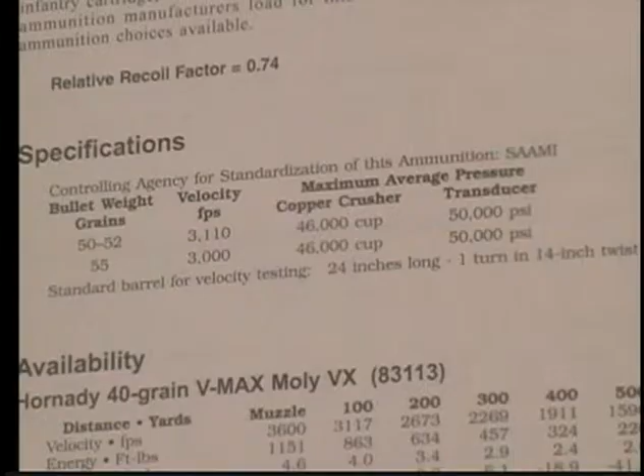One of my favorite books is this Ammo and Ballistics by Bob Forker, and this happens to be the second edition. I understand the third edition is out now. The advantage to this book is that it contains a great deal of reloading data, but it also has a complete cartridge drawing, and we have also a couple of different kinds of pressure data listed under specifications here. We have standard bullet weights, we have velocity in feet per second, and then we have copper crusher units and transducer units, which is PSI.

The difference between copper crusher and transducer is just literally worlds apart. They are not directly correlated systems, meaning that you can't take the two of them side by side and match them up. Copper crusher is the older system, and it was based upon the concept that you can take a piece of copper of known size and known quality and crush it, and that dimension can help you measure pressure. Now it measures only the peak pressure because when it is smashed, it's going to go to that peak pressure and stop. So you don't get a linear progression, you do not get a form wave that you can read that tells you what the pressure wave looked like.

So in that respect, it's fairly limited data. The other thing that we know about copper crushers is they're fairly limited in terms of quality and quantity. There are agencies that make this material for testing purposes, and they're very reliable. They've been doing it for a long time. But because we only get the peak pressure data, we're not getting a lot of useful information.

Transducers are a little different. They're a simple device glued to the outside of the barrel, and the dimensions of the steel are entered into the software, and this allows the software to translate the stretch of the steel through the transducer into a waveform so that you can actually see in real time the form of pressure, so that it starts low, runs high, drops back down, and with everything entered, you can even see the exit point of the bullet.

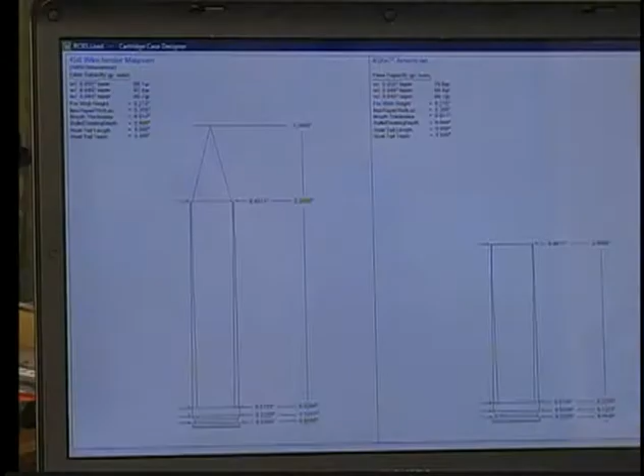On the left we have a 458 Winchester, and on the right we have a 458 2-inch American. Now the advantage to having a comparison side by side like this is you can take a look up in the corner here. We have some specific data for the cartridge in question. Initially it tells you what the cartridge is, or if you had a Wildcat name it would be listed here, and then it would list a parent cartridge. Case capacity in grains of water is very important. This isn't case capacity in powder, it's in water.

The way that is measured for this system and virtually every other that I'm aware of is to the top of the case mouth. When you do water capacity in a case, if you do it below the mouth of the case, you're going to get an inconsistent number. Some cartridges don't have a neck at all, so there would be no way to be uniform. So to be uniform, be sure you do your water weight capacity right to the top of the case mouth.

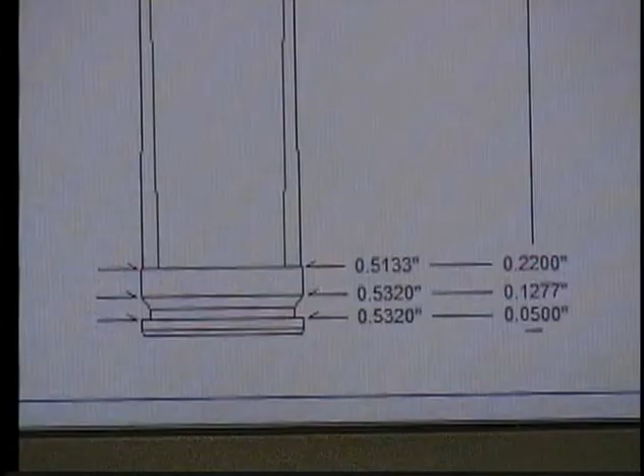The diagram includes dimensions for the diameter of the case, and on the right you're going to have length dimensions. As you move up the case, you'll get a length dimension for the full length as well as a mouth dimension here. This is your diameter of your mouth. And then it'll also give you an overall length. This is assuming the overall length for a magazine. This is a maximum length. So you can see why the software is so valuable to us when we do our research.

The research is the most important step, I believe, in the process. I said before, research, research, research. I really believe that. If you spend time reading about cartridges, if you do the research in books, use the software, it's very valuable. It's going to make it easier for you to make these decisions as you go down the road and not waste a lot of time on things that just won't work.

So I wholeheartedly recommend to you that you get a bunch of books, read them, research, look at the differences between cartridges and try and get a feel for what would be an interesting transition from a big cartridge to a small cartridge, or more velocity. How am I going to get that? Oh, okay, I need more case capacity. The more you look at these things and spend time looking at case designs, the more interesting it'll become to you, the more exciting it'll become, and it's just plain fun.

Now, I think we should probably move on at this point and talk about our project that we were going to get into with our little 358 Indy. And I think in order to do that, we should probably just go to the software. That'd be a good place to start.

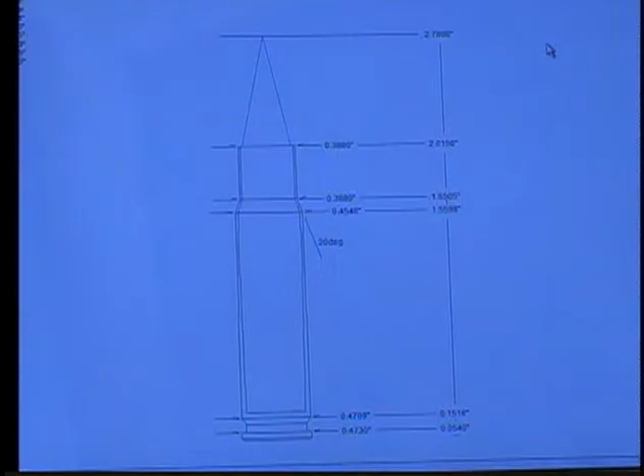So we're going to go to the menu here and tell it to draw this cartridge. We're on the 358 Winchester right now, and it draws the cartridge for us with all the dimensions so that we can kind of make a determination as to whether this is something we want to use. Now the first thing you're going to want to think about is the diameter of the case. Is it big enough? We know it is because it's already a 358 caliber. So the next thing we're interested in is whether or not we have enough shoulder diameter and length, and we clearly do because it is a 35.

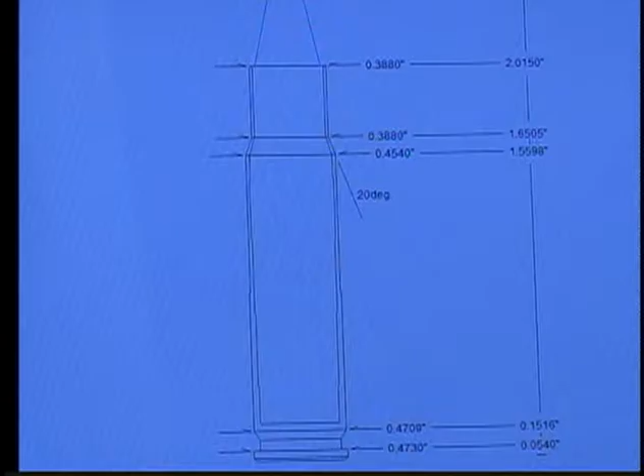The big consideration here is going to be, do we have enough case capacity for what we're trying to accomplish? In order to make this cartridge work, we would have to adjust the length considerably. Right now it is 2.015 in length, and we would have to shorten it almost 400 thousandths. The midpoint of the shoulder is about where we'd end up for our overall length. Consequently, we would lose a lot of case capacity. Now, that doesn't mean it wouldn't work. I think this cartridge would meet our needs. We can shorten it enough. We'd still have a shoulder. We'd have everything we need to make a functional cartridge. So this is one possibility. But I think we should look at some others.

Now, we can leave this cartridge up for reference. We can go back to the reference menu and choose another cartridge. A lot of people, when they start working with Wildcats, like to work with single shots because it gives them an opportunity to build an inexpensive gun and test a new idea. So one of the things we might try here is to look at a rimmed cartridge to see if that would work for our project. So we're going to just move across and find the 35 calibers again, just a simple way to do it. I happen to know that a 357 Herrett is close to our specifications for length, so we're going to go there. We'll click Draw. We now have both cartridges on the screen at the same time.

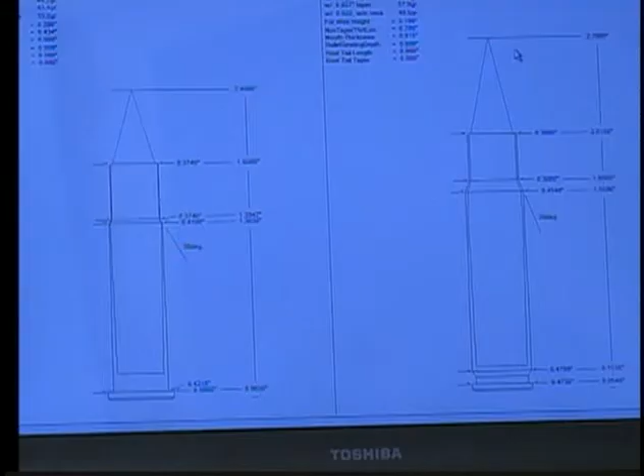So we have the 357 Herrett on your left. When we look at the overall length, it's clearly long enough for what we're trying to accomplish. The shoulder position is far enough down so that we could shorten the neck and have a cartridge that would fall within our length parameters. So this cartridge too would work. So either one of these cases would work just fine, but there's another consideration. We need to think about performance. Deer hunters are going to be looking for something that will allow them to have a little more power. These two cases may or may not be what we want.

Let's look up the 358 Winchester and see where it falls in our power range. And I want you to get the idea of going back to another book. You're not limited to the software, you're not limited to one book. Do research, move back and forth between the different pieces of material that you have at your hands. According to this book, the 358 Winchester is going to have about 2,370 feet per second for velocity, which is pretty minimal for a deer class cartridge. So if we shorten that case and minimize the amount of powder we have in it, we're going to have a case that is really not much of an advantage over the pistol cartridges that are available in that range.

And because the 357 Herrett is even smaller yet, we know that we would also be limiting ourselves to a fairly low power cartridge. So we're ready to go back to the directory and look for some larger cartridges, something with more volume. Before we do that, we should write down the case capacity of the 358 Winchester so that we have a reference point. We know we need something that will at least be this large.

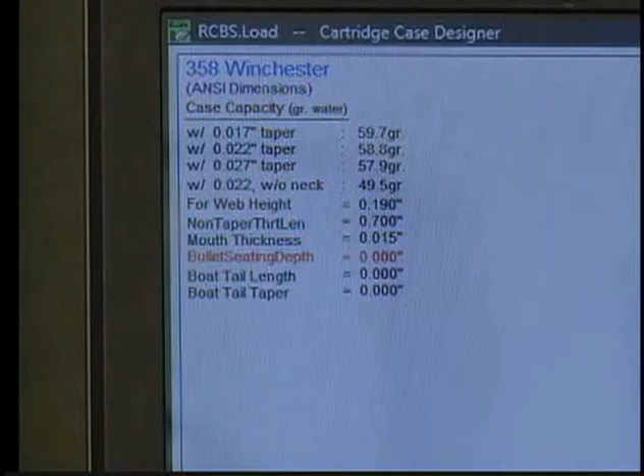So we're going to go back to the software. I'm going to make it a large screen so we're only looking at one cartridge. So we're going to move to the upper left-hand corner of the display. You'll note at the top that the name of the cartridge is listed. The next thing down is case capacity in grains of water. But that's not the capacity of the 358 Winchester. It's a theoretical number that you can use for design decisions.

And you'll notice that down below that there are a few more numbers giving different tapers. Again, these are theoretical numbers to help you make decisions. The number without the neck is, again, another thing to help you make decisions. In order to get the information we need on our cartridge, we go down to bullet seating depth, and we right-click on that, which selects that item. Now we're going to jump to the other side of the screen, and we use these little arrows to change the dimensions on this particular cartridge.

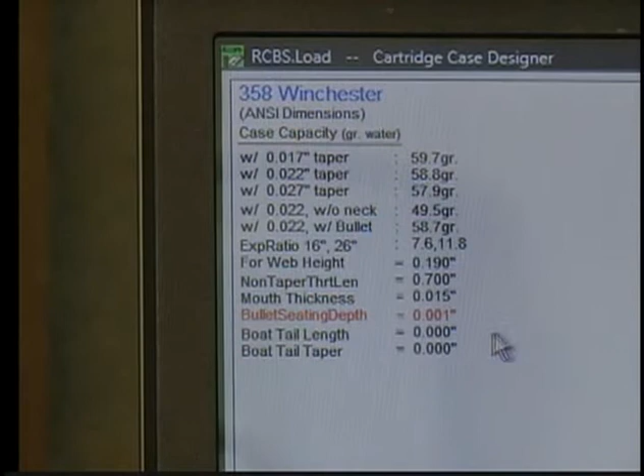So we're going to go up 1,000th, just one click. What that does is it confuses the software into believing that we have seated a bullet 1,000th into the neck, so it's going to give us the full case capacity of the cartridge. So now we'll go back to the other side of the screen. The first thing we'll notice is the bullet seating depth has been changed to 1,000th. And then a new line has been added. It says with bullet, and it gives us a case capacity of 58.7 grains. So that's the number we're going to write down as our full case capacity, and that's for the 358 Winchester.

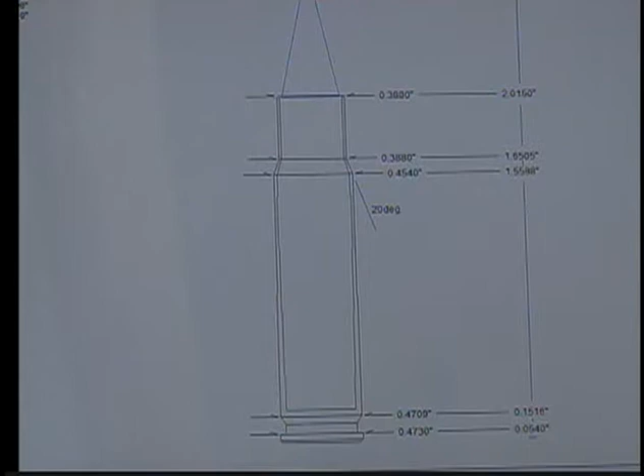It's important that you keep track of these little details so that as you progress along, you'll be able to match things up. So now let's look at the cartridge drawing again. We want to collect a couple of other pieces of information. We want the shoulder diameter, which is 454, and the base diameter, which on this drawing is 4709. We can just call it 470 and that'd be close enough. So we're going to write that down, base of 470 and shoulder of 454. We're going to use that information later to make sure that we're looking at a bigger cartridge.

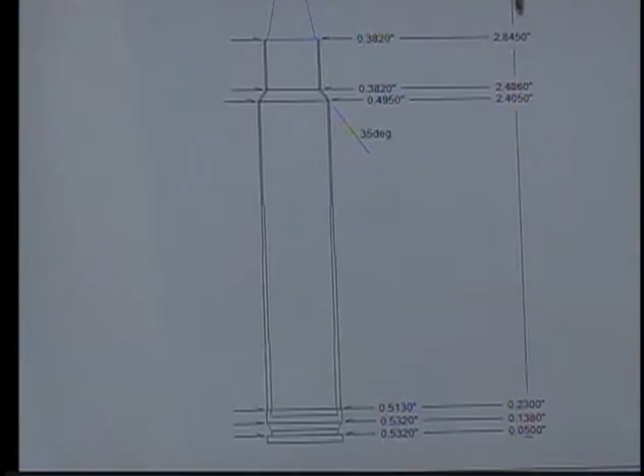So we'll close this particular pane and we'll go back to the reference library and pull up another drawing. And it's my idea that we'd go to a Magnum case to see if we can get something that's bigger. So we'll go to the 358 STA, that happens to be a large Magnum, draw it. Now the 358 STA is plenty long enough, so that's not a concern. Now let's look at the shoulder diameter. It's 495, so we're very large there, and at the base we're 0.513, so we're quite a bit bigger than we were with the other cartridge.

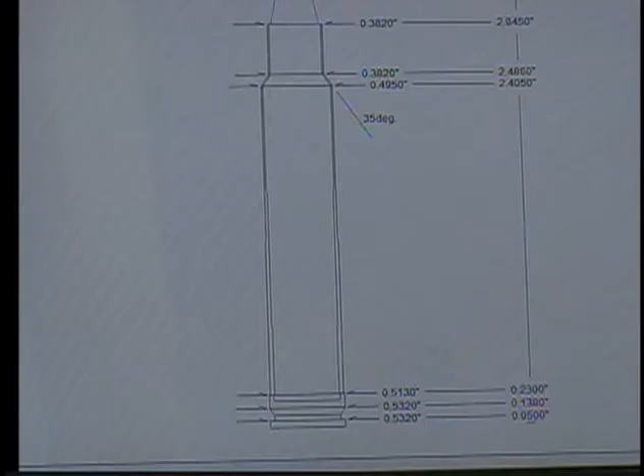Now, one of the disadvantages to going to a belted case is when we do a short design like we're talking about, that could present feeding problems because a belt is just one more thing that has to be fed through the system. So while it's a great way to headspace and a lot of people believe it adds strength to the case, there is the disadvantage with feeding, especially in a stubby case. So we may not want to choose this cartridge just simply because of the added difficulties we might get from this belt.

In addition, let's look at the shoulder. The shoulder height on this case is 2.486, which is very long, much longer than we need for our cartridge. The concern that you'd have there is when you go to reform this case, you'd have to push this shoulder down far enough on the case to leave you an appropriate length neck, and also to provide a cartridge that fits our parameters. So it'd be a lot of work. We'd be moving a lot of brass, and it would take extra tools. So not the most efficient use of our time, and that might not make this the best choice. But we can put it on our list because it would work. So we'll just write down the 358 STA as a possibility.

And then we can go back to the directory and look for something else. So we'll close this pane, go back to reference, and some other big magnum. I know that there's a non-belted magnum, like a 300 Remington Ultra Mag would be a good choice. So let's see if we can find it here. Remington Ultra Mag. And then we'll just tell it to draw.

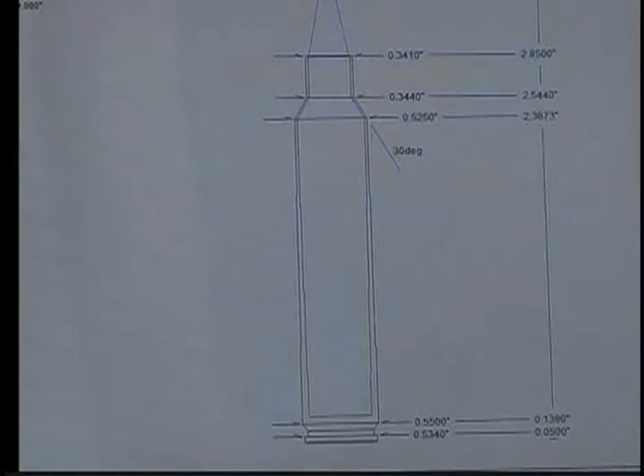Okay. Now, this case is 2.85 in overall length, so it's plenty long enough. Again, the shoulder is very high. It's 2.544. And base diameter is 550, so it's larger in diameter. That's a big advantage for us. We're going to get a lot more case capacity from a larger diameter case. We know that our 358 was 470 at the base from our notes, so this would give us quite a bit more case capacity.

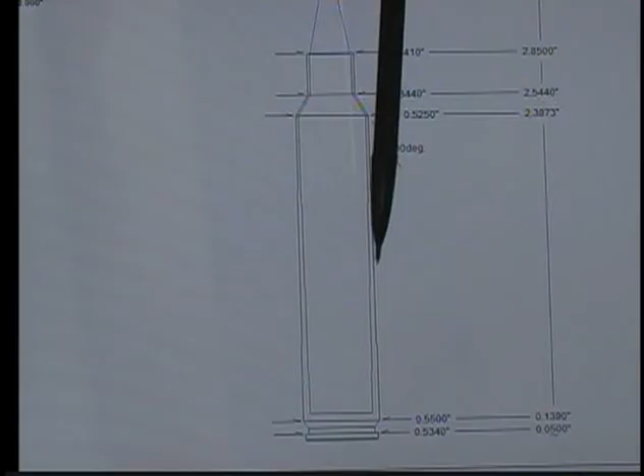Again, this one has the disadvantage of we would have to shorten it considerably, and a lot of these cases, when you shorten them a great deal, are thick in the case wall, especially right here in the midsection of the body. So it's a good idea to avoid that kind of change in the brass if you can, because you're going to have to do some different reaming and thin out the brass in order to make it functional. So while this one has more case capacity, I probably wouldn't pick it because there's so much brass work that I'd have to do. So we'll close this pane and go on and look for another cartridge that might work.

We'll go back to our reference chart. This time let's try something that we already know is pretty short. So I'm looking at my directory of cartridges here, and I see that the 25 Winchester Super Short Mag, or the WSSM, is not listed. And that might present a little bit of a problem, but I've told you before, and I can't say it often enough, you need to have other resources. So you could either go to a book, or in this case I'm going to go to another piece of software that I'm pretty sure will have what we need in it.

So we're just going to close this window, and we will move on to that other piece of software and find out if we can do that. So bring up this software now. This is a little different look. On the left-hand column we have our list of cartridges, and we're going to look for the 25 WSSM, and all you do is tap the bar here and bring it down to find the higher calibers. And we're in the 25s, and now we've gotten to where we're starting to see dashes and various caliber designations, so we're past where it would be. I don't see a 25 WSSM.

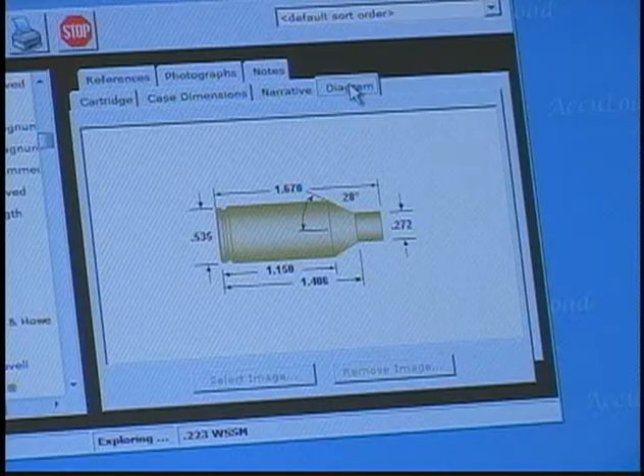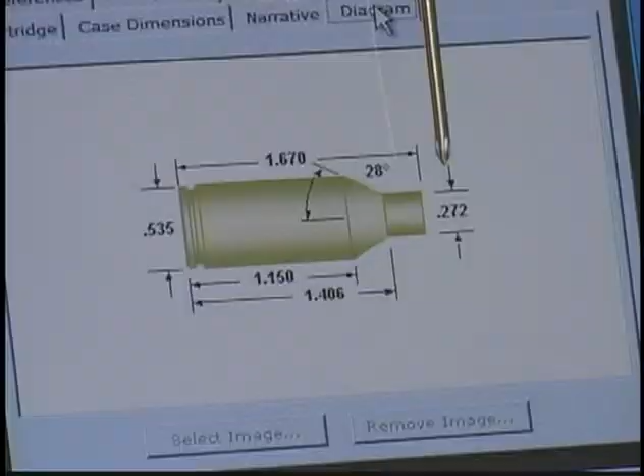Now what we have in the cartridge is, we'll look right here, our overall length, 1.670. Now that's very close to our dimensions that we're going to have to use overall. The diameter of the base is 535, so it's much larger diameter than the 358 was, so we're going to have a greater case capacity. Now the problem you might notice is the neck diameter is pretty small, and that's going to skew our number for our water weight capacity a little bit. Now when we redraw the case later in the program, you'll see that we can calculate what the actual water weight capacity is going to be, so that's not a big issue.

We're just going to use this drawing clearly to tell us that this is a potential cartridge for our project. In the real world, I selected the 223 WSSM for this particular project, and the reason I did was related largely to the fact that it was very close to the design parameters. And that's one of the things we want to emphasize.

The more cartridges you look at, the more references you check out, it's very likely you'll find a cartridge that's close to what you're trying to accomplish. And that'll save you time and money. It'll save you work in terms of making tooling, in terms of making reloading dies. It'll save you money in terms of ordering those things from someone.

So when you go to design a cartridge, just remember, go back and look again and again and again to see what else is available, because there's almost always a cartridge that's very close to what you want that will require minimal changes. Keep in mind, you need to have a case that has dimensions that are appropriate to the project you're working on, and also that has the case capacity or the volume that's going to work with the project you have in mind. Those are two very important criteria.

Now we're ready to move on with the next stage since we've finished our 358 Indy. But we have some opportunities here to talk about other types of wildcats you might be interested in working with, and this will give you some scenarios that are different from being limited to specific dimensions like we were with these state regulations. So we're going to look at a possibility here.

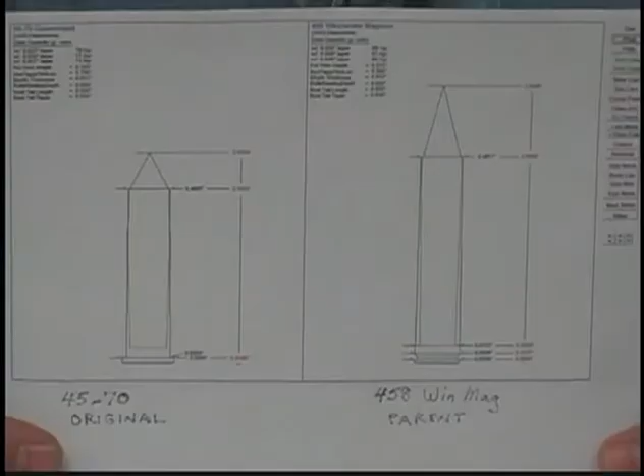On your left we have the 45-70, and that's an original black powder type cartridge that has enjoyed popularity for a very, very long time. So let's say that you really like this cartridge, but what you're looking for is something with a little more punch, something maybe a little more modern. So you decide that you'd be willing to put it in any gun, and so that changes your parameters in terms of designing a cartridge. You're able then to go to any action and any pressure level really, and so it just frees you up.

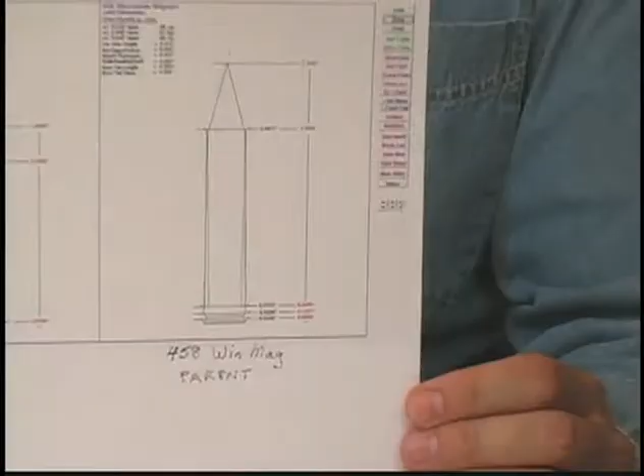So we looked at the 458 Winchester as a possibility as a parent for this new wildcat. Now the 458 Winchester is considerably longer, and the factory version runs higher pressures than we had in mind. You know, we're looking for something that's just a little better, has better loading flexibility than the 45-70, and takes advantage of stronger brass. So by going to the 458 Winchester, we've opened up those possibilities so that we can try and achieve a little more loading flexibility and be able to get some higher pressures and higher velocities. So let's look at the next step.

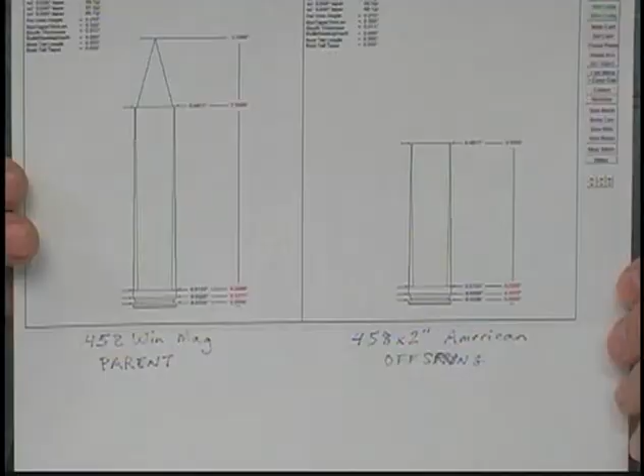Here we have the 458 Winchester on the left, which is our parent cartridge, and then we have a proposed cartridge on the right, which is the 458 2-inch American. 2 inches is just a nice round number. We know it'll work in shorter magazines and will be a functional cartridge. This cartridge has slightly less case capacity than the 45-70 we started with, but that's not going to be a problem because we've gained the ability to use different powders and load to higher pressures. So you'll get that gain in performance, that increase in velocity that you were looking for.

It just so happens that this cartridge was already designed by a gentleman by the name of Frank Barnes. We just showed it to you for the very reason that we wanted you to understand that there are many reasons to design a wildcat. This was just one. Now let's talk about another reason why you might build a wildcat.

Let's say that you have a favorite rifle that you've had for years, and for some reason the brass that you use for that cartridge has become hard to get. It's virtually unavailable. Now, you've looked around to see what other cartridges you could conceivably rechamber to, and it appears that there's nothing available on the commercial market, and so a wildcat starts to become a good idea.

You look around and there are no wildcats in this particular area, so the first thing you do is start to look and see what cartridges are available that might allow you to go to a larger diameter and clean up your entire original chamber. So in our made-up example, your favorite gun was chambered in 358 Norma Magnum. In real life, that brass really is hard to come by.

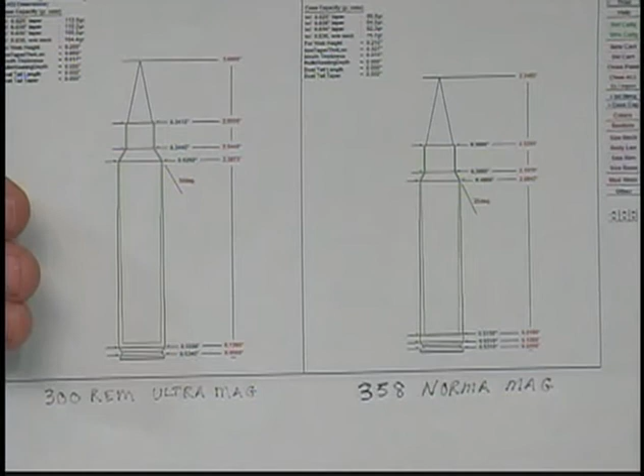So we started looking for a piece of brass that would allow us to completely clean up the original chamber. The 300 Remington Ultramag will accomplish that. You can see here that it's considerably larger in all dimensions. The disadvantage is it's longer than our original cartridge, so we'll have to move the shoulder down and shorten the case to make it work in our shorter magazine.

Now in reality, a client asked me to build this cartridge. This is the 300 Remington Ultramag cartridge, which we chose as a parent when we decided to replace our 358 Norma Magnum. So you can see by the replacement cartridge that we've reduced the length of the cartridge somewhat, and we've moved the shoulder back so that it'll function through our new chamber.

Now the customer was happy with the results of this project, and he named the cartridge the 358 Yukon. It resolved the problems that he had and allowed him to continue using a favorite gun. Now for us, it's simply an example of one more reason why we might design a wildcat.

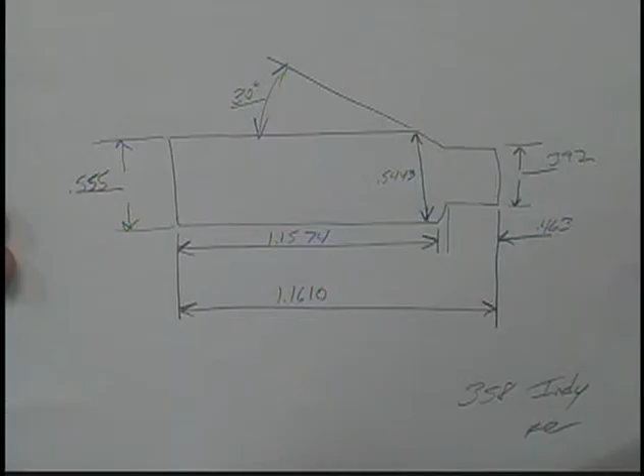When it comes to doing drawings to represent your cartridge, there's a number of ways you can do it. You can start with something as simple as a pencil drawing, and it'll totally suffice. All you're going to do is gather the pertinent data. You want your base dimension for the cartridge, the shoulder dimension, neck dimensions, length from the base to the shoulder, and the length from the base to the full length of the cartridge.

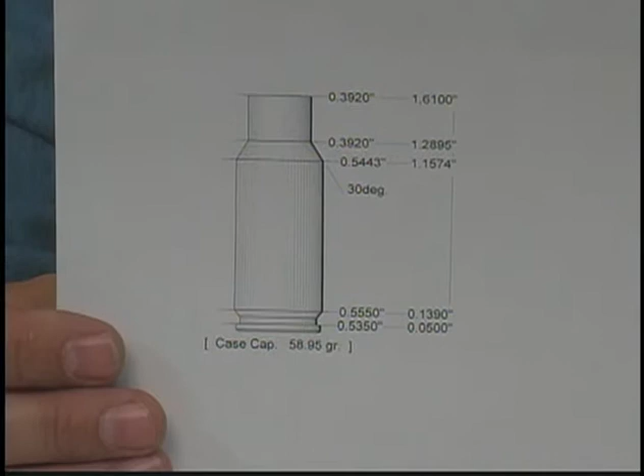The advantage to this, of course, is it automatically adds in a couple of other extra things. A little easier to read. It's going to give you your lengths for the neck and that sort of thing. So it has some advantages, but it's no better or worse necessarily than a hand-drawn drawing.

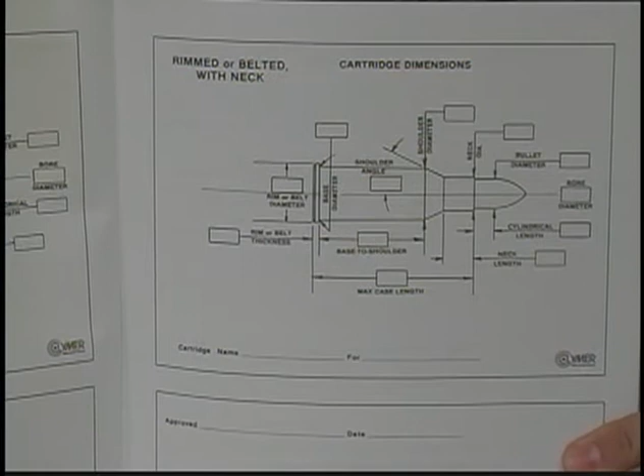Now, Clymer Manufacturing in their product catalog includes something that's very useful. It's just a simple set of drawing templates, and they're available for all the different styles of cartridges, whether it be rimless, rimmed, or belted. You can either do a cartridge drawing, or as we're showing at the bottom here, you can do a reamer drawing. I usually recommend, especially when you're just getting started, that you do the cartridge drawing. It's the easiest one for you to do. You can measure directly off your brass and get real-world numbers so you know exactly what you're working with.

So after using that, what you can do is you just photocopy those pages, and we took our same dimensions and just entered them in the appropriate boxes. And there is a little bit of room here for some extra information. It's not essential that you add this information, as the reamer maker knows how to do that.

The drawback to this particular drawing is that it doesn't directly represent your cartridge. It's just a visual representation of a bottleneck case. So you're going to enter your dimensions, but it does not give you the direct visual representation of what you're designing. So just keep that in mind.

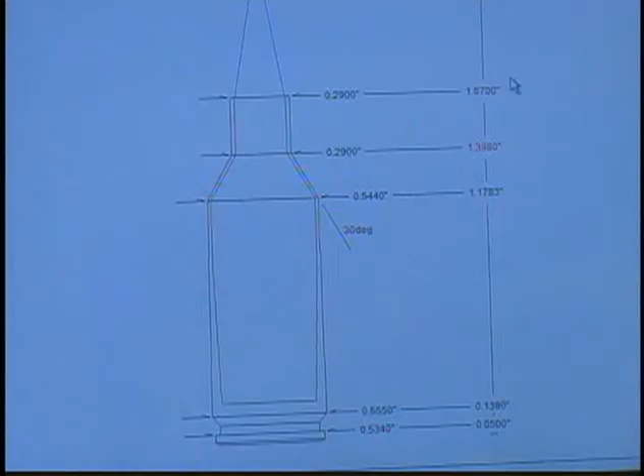Now we can go to the software and draw a cartridge, and what we have here is the 25 WSSM in the software, and we're able to modify the shape of this case on the fly. It's fairly simple. We'll go and select particular items. Right now we have the length dimension selected here. That's not going to do us much good at the moment, so we'll go over and select the neck diameter. We're going to resize the neck over here on the menu.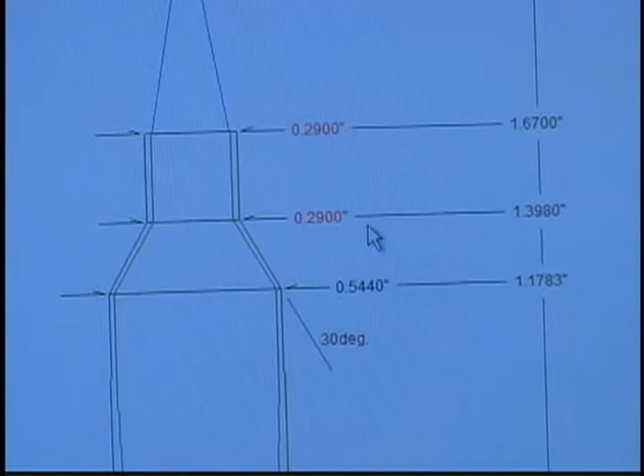So when we do that, it selects both the upper and lower measurement for the neck, so that we'll be changing those dimensions at the same time. We just simply go over to the up and down arrows. We're going to be increasing our diameter, and for a 358, .386 is a normal outside neck dimension for loaded ammunition, and that's what we're representing here. So we'll just click the up arrow until we get to .385, and we move over one thousandth and we'll get to 6.

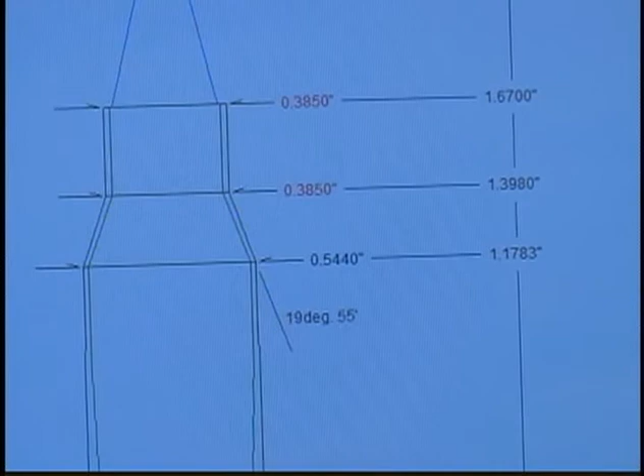Okay, now we've changed that, and what it does is it changes the shoulder angle at the same time, so we're going to have to make a correction for that. We've decided already that we're going to keep the same body of this case and simply rework the neck and shoulder area. So we'll now correct the shoulder length in order to get the shoulder angle back to 30 degrees where it started. So we just select that length.

That's the junction of the neck and shoulder. Drop over to the down arrow and move that down, and you can watch the angle change as we bring that junction down. And we're going for 30. I went a little too far, so we just go up. 31, that's 29. So by switching to the different arrows, you can modify how much you're changing it. We're down a little bit, so we need to go the other way. Okay, we're at 30 degrees.

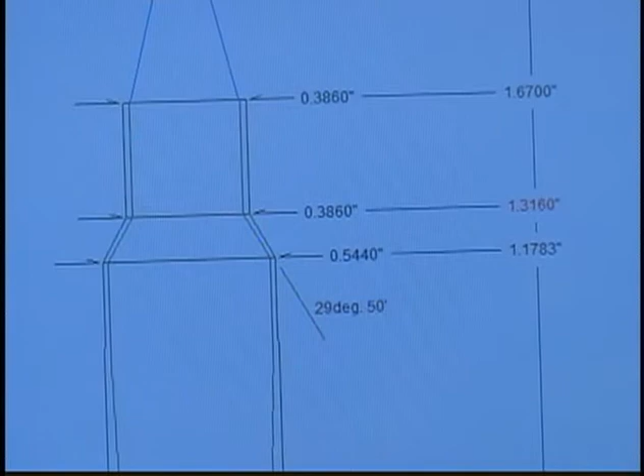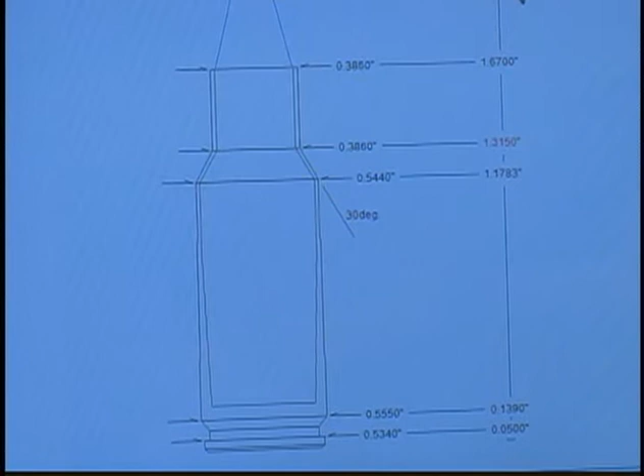So this gives us a representation of the cartridge pretty much as we want it. The only thing that's wrong right now is the length. So we have a base diameter and a shoulder diameter that will function with us. We have a neck drawn for 358 caliber so that it'll accept the bullet. And then we're going to have to come back and shorten the neck in order to meet our dimensions. Let's take it down to 1.61, which will be just a little bit shorter than the maximum dimension, and that allows for some brass stretch, and will keep guys out of trouble in that respect.

So we'll just again select the length, and shorten it up. And there we are at one. Oops, I'm in the wrong column. Move over one more. There we go. 1.61. So now we have a dimensionally correct drawing for our cartridge.

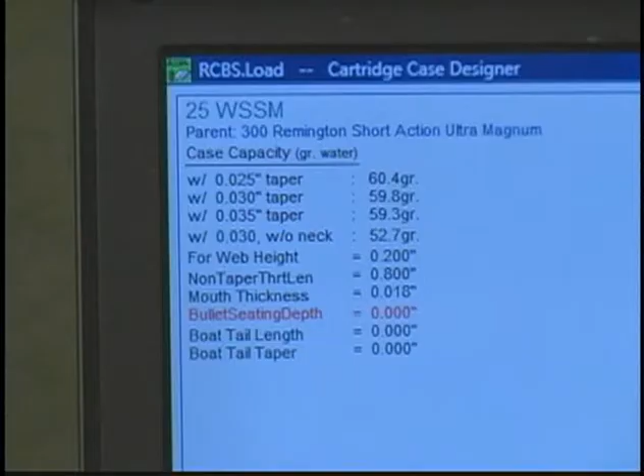And all we need to do is get the case capacity for this specific drawing so that we know how to compare it. So I'm going to move up here to the bullet seating depth, just like we did before. We select that, and then we have to run to the other side of the screen to change the seating depth. We just go up a thousandth to get that, and back to the left again, and we're going to look at with bullet. We have 59.8 grains of case capacity.

So we actually have more case capacity than we did with the 358 Winchester, which was 58.7 grains. So it's not a great deal of case capacity change. It's probably small enough that you wouldn't see any real difference ballistically, but it does meet our minimum requirement. So the drawing's complete, the dimensions are correct, and we're ready to print it out.

However, there's nothing wrong with the plain old hand-drawn drawing. The reamer maker can work from this and give you a perfectly good representation of your reamer. Just make sure your dimensions are correct, because he'll build what you tell him to. Now, when you send that off to him, he's going to send you back a finished drawing. Pretty cool, huh? This is going to be something that represents everything he needs to build your reamer. Now that the drawing's out of the way, it's time to go to the next step. We're going to compare our cartridge to other existing cartridges and make sure we're not repeating history.

We're ready to start talking about steps 4 and 5. Step 4 is the process of comparing our cartridge to existing cartridges. Grab your research materials and go back and look. We need to find out if this cartridge is going to duplicate something that's already in the market, either commercially or as a wildcat. Now, once we know this, we can make a decision whether or not we want to build it. And it's up to you to decide that. It doesn't matter if you've got a cartridge that's very similar to something else. If you decide that it's different enough and it's something you want to build, you're free to do that. After all, you're the king.

Now, the idea here is we're trying to make you fully informed. We don't want you to show up at the range someday with your brand new Irgersplitten Loudenboomer and have some guy lean over your shoulder and say, wow, that looks just like a 308 Winchester. And you suddenly find yourself in an embarrassing situation. Instead, you'd be able to turn to him and say, well, yeah, this is very similar, but I'm doing it my way.

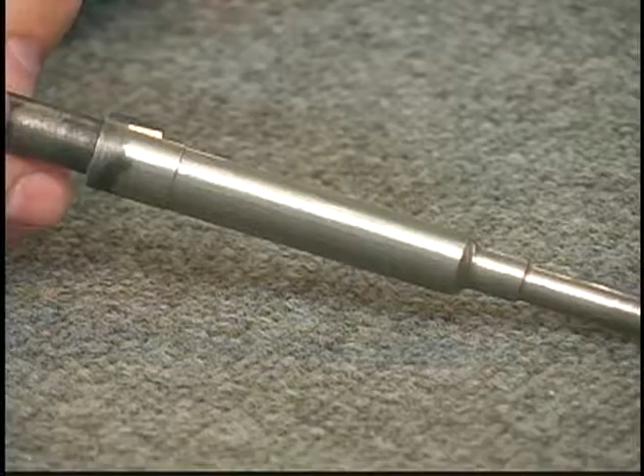You're probably asking, what is this unassuming little tool? Well, it's a single flute chamber reamer, and this is where we often call these a cannon reamer or a shell reamer. And you're probably looking at this. I know when I teach my classes and I pass these around, the guys always say, are you kidding me? We're actually going to try and cut a chamber with something like that? It doesn't look like it would do anything, but you'll be amazed just how fast this will peel up chips and cut. They work every bit as good as a multi-flute chamber reamer does.

Now, the things you should know about these, they can be used for a lot of different things. You can use them as a chamber reamer. You can make them specifically to do neck work, throat work. You can make them for resize reamers. Just about anything that would use a form cutting tool, you can make a cannon reamer to do that particular job. Now, the tools you need to make these are pretty straightforward. Any shop that has a lathe and a mill, you'll be able to make one of these. You don't even really have to have a mill, because you can use a grinder to do the half profile. And you will be using a grinder to remove the excess material from the reamer later in the program.

Let's talk about the pros and cons of a cannon reamer versus a multi-flute conventional reamer. The pros are that the cannon reamer itself is cheaper to make. It takes a very small amount of material. They're highly versatile. You can make them in any shape or length that you need. They're easy to produce. It doesn't take a huge amount of skill. If you can run a lathe, you can easily make one of these.

The cons are that these reamers have a relatively short life. They're not good for production work. One possibility is you might warp it during heat treat, and of course that means you're going to have to make another one. I recommend that you just plan on having to do that, because I've made several duplicates myself over the years when I've made one of these and it warped during heat treat. Large diameter reamers can be a problem because they tend to grab in the workpiece. So when you make one of those, you'll probably want to make it in a 2-flute, and we'll show you later how to do that.

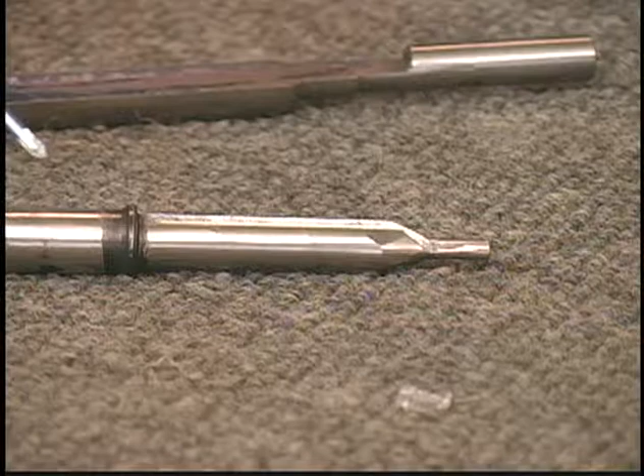This one, you can see here we have a nice long taper. You can see the beginning of the shoulder here, nice clean angle, and then we have no neck whatsoever on the pilot. Now, the reason for that, of course, as we discussed a moment ago, is that the die blank itself can take care of that. All we have to do is ream the die blank to the correct dimensions, and this pilot will just run in that hole and cut us a nice clean body. The neck is taken care of on its own.

Think of how tedious it would be to have to turn a neck on a small diameter like this and then have to do the relief grinds. It would take a great deal of time. It takes a lot of time on a larger reamer as well, so we're really talking about simplifying the process, allowing the die to take care of the neck. Now, I would recommend that when you go ahead and start this process, that you practice with one that actually has the neck built into it.

And you should do it 2 or 3 times, because you're not going to get it right the first time. There's nothing wrong with making mistakes, and frankly, drill rod's pretty cheap. So making mistakes isn't a problem. You're going to learn more from that than you do from your successes. And I'd recommend that you go ahead and do some practice pieces in advance, because you don't want to be on the clock when you do your first reamer.

Now, the reason we talked about doing the cutting edges on the neck, and that's a good thing to practice, is because someday you're probably going to want to make a chamber reamer this way. And I'll talk more later about the other features you need to include in that, but that'll be good practice and you'll be ready for that later. So let's go make a reamer.

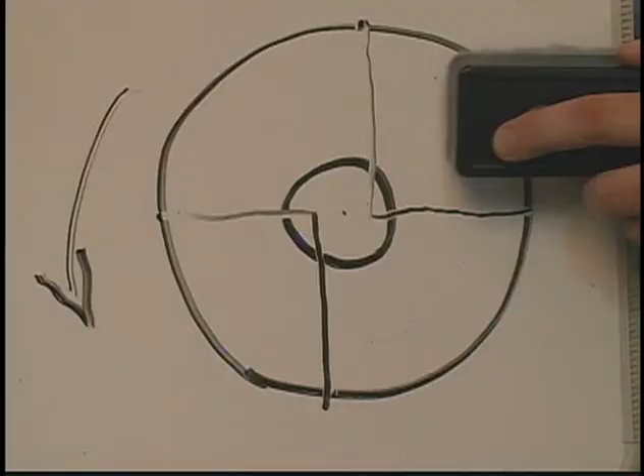If we get below center line on our cutting edge, we'll cut too large. If we go above center line, we'll cut too small or not at all. So keep those things in mind. Now once you've made these cuts, of course, the reamer is going to look a little different. It's going to be more like this. We'll cut this other part away. So you're going to end up with a profile that looks something like that when you're looking at it from the muzzle. And you note that the two don't cross in the middle, which would cause a weakness to the reamer.

So when we start the relief grind process, we need to think about a couple things. First of all, behind the cutting edge, you want to make a relief grind that's just a little deeper than probably the rest of it. And what I usually do is I come in and I use the radius of the wheel to cut about a 20 thousandths deep groove below the cutting edge. And the purpose of this groove is to give a place for oil and chips to go to so they won't get caught behind the reamer and cause scratches or galling. I leave about a 1/16 of an inch that's going to be the edge that we're going to sharpen later. I leave that right at the cutting edge.

So once we do that, we'll come back and we'll also grind away behind this all the way along here. The only place the reamer is going to touch when it's finished is on the pilot and on the cutting edge. So we're going to shrink the profile of this reamer except for the diameter of the cutting edge. That's the only dimension that is going to end up remaining full profile. Now we'll do the same thing on this one.

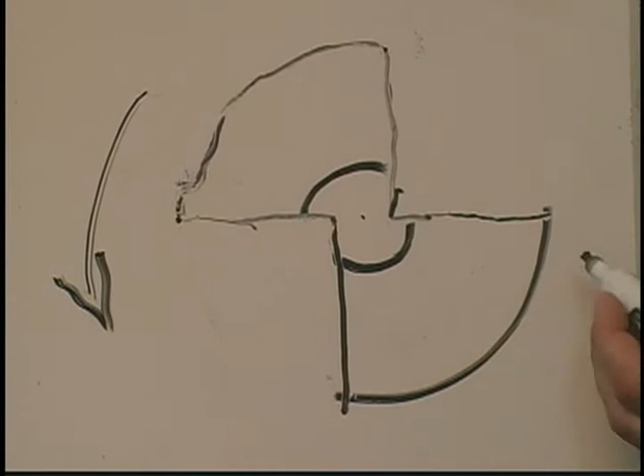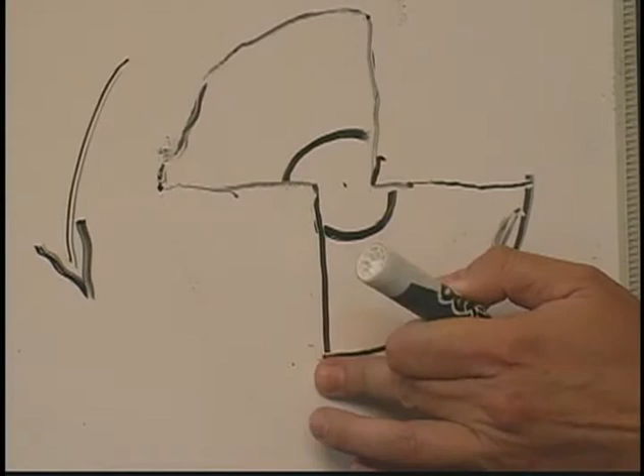We're going to do another 20 thousandths relief grind down here, and we'll also do a relief grind behind the cutting edge all the way around, again reducing the profile but leaving about a 1/16 of an inch up here at the cutting edge. This area of relief behind our groove is probably only 10 or 15 thousandths. It's not as much as we cut here, but it has to be enough so that it clearly does not touch and chips can't get caught in between. So just figure 10 or 15 thousandths and that'll work.

If perhaps you do have something touch, it'll show up right away. There'll be a shiny spot on the reamer and you'll feel it. The reamer won't want to cut clean. So you'll be able to go right back and grind that off.

Now when we go to the other reamer, the single flute reamer, the same system applies. We're going to go behind the cutting edge and we're going to grind away our 20 thousandths deep area, so that you leave about a 1/16 of an inch at your cutting edge, and then we're going to relief grind the entire circumference behind the cutting edge all the way around, reducing the dimensions all the way around this reamer. And again, the only part of this reamer that's going to touch when it's actually cutting is the pilot and the cutting edge.

Nothing else on the reamer touches. If it does, it'll cause galling and it'll cause problems in your chamber. It will not be accurate, it won't cut well. So just remember, only two things: pilot touches, cutting edge touches. Your cutting edge will be about a 1/16 of an inch wide at this point, and we'll go back and hand sharpen that in a little bit. We'll show you how to do that.

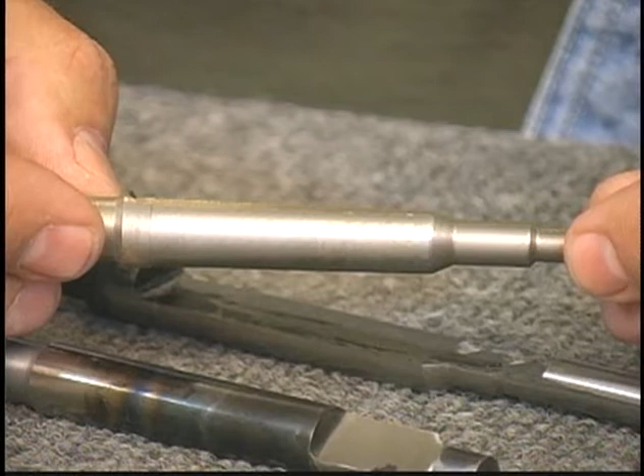Now that I've taken you through the entire process of turning, cutting your major relief, and relief grinding your reamer, let's look at a couple of specific details. This particular reamer is completely finished in terms of our machine work.

It has been turned, it has its taper, has a neck, and the major relief grinds have been completed. Notice this is a two flute, so we have one here, and you roll it over and there's a second cut. What I didn't tell you before was that this is the stage where we'll stop and heat treat the reamer. The reason for that is it gives us a better finish once it's hardened, and it'll be easier for you to get a good consistent grind on the tool without cutting too far, and you'll get a nicer looking, better cutting reamer when you're all finished.

Let's look at a couple of other samples. I wanted to show you this reamer because it's a different configuration than the other reamers that we've made, but the process is exactly the same. You'll note that you can see the effects of heat treat on it, but in terms of the technology we use, the shape of the reamer and the way it's been relief ground is exactly the same as what we've taught you on the other reamers.

Now, here's the single flute reamer that we've looked at before. I want you to notice that there's a bit of a relief grind on this flat, and the purpose for that is to give us a better, cleaner cutting edge. It'll pull cleaner chips and produce a better finish in the die or in the chamber. Now, on the back side you can see some of the relief grind behind the cutting edge, and then you can see that it has been relieved all the way around so that nothing will touch.

I almost always do this relief cut when I do a single flute cutter, but it's not absolutely necessary, and when you do a two flute cutter, you really can't reach in there and do this grinding, so don't worry about it. Now, if you don't understand anything we've covered on this section, it's a good time to rewind and look it over again, because it is a pretty complex group of operations. And this is the heart and core of the entire process, so you need to make sure you understand it so you'll get a good quality die or a good quality chamber from your finish reamer.

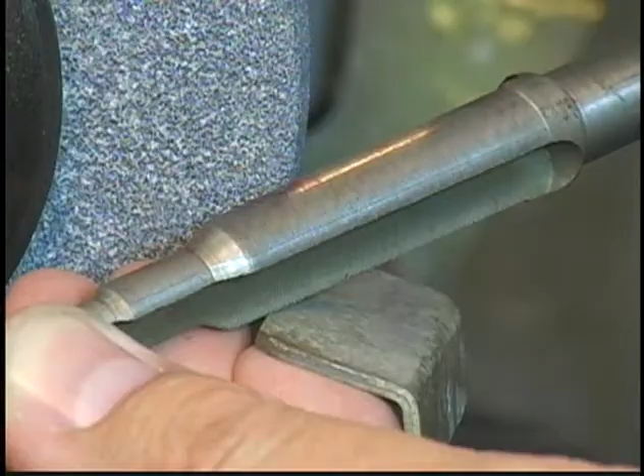Okay, so now when you look at this reamer, you'll see that I've scribed a line starting at the beginning of the neck, runs all the way back along the shoulder and along the length of the body. All I have to do is remember not to grind beyond that line because this will be the cutting edge up above here, above that line. You ready to go? Let's start.

When I start grinding these, I try to keep the reamer parallel, the reamer's surface parallel to the front of the wheel. We're not trying to cut any grooves or anything that would be out of concentricity with the reamer itself. So keep it parallel to the face of the wheel, and I always start my first cut right at our line that we just drew at the cutting edge. So I'm going to start so that I can see from above that I still have that 16th gap.

I'm going to start at the shoulder, work my way all the way back along the body, and when I get to the back of the body I'll just go ahead and reverse direction and run back up this way, and then I'll stop and check and see how much I've cut. And if it's not deep enough, I can go back and hit it again the exact same way, again remaining parallel to the face of the wheel.

Just run from the shoulder all the way out to the back of the reamer and then reverse the process again. As soon as you feel you have enough relief here so that you won't have to worry about chips and oil and things collecting behind the cutting edge, then you're ready to move on to the rest of the relief grind. You'll repeat the same process on the shoulder and on the neck.

When you do the shoulder, it's just a little bit different. You're going to tip the reamer so that you're facing the angle of the shoulder to the face of the wheel. It's okay if the wheel undercuts a little bit on the back side of your neck as long as you don't cut up into your cutting edge. So just line yourself up with the shoulder aligned to the face of the wheel, and you're going to relief grind up to your scribed line.

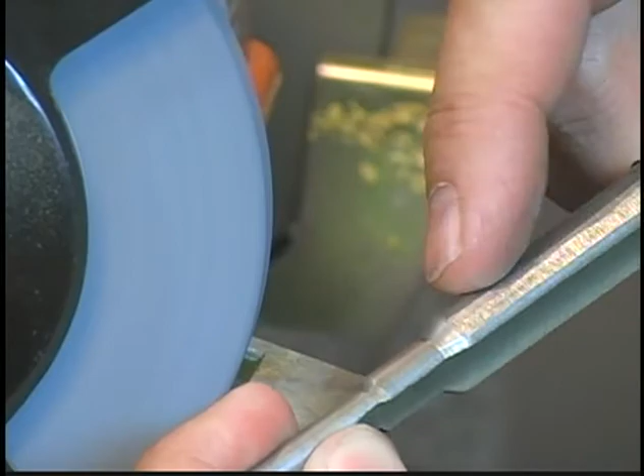Okay, we've ground right up to the line. We've clearly removed enough material so that we wouldn't have to worry about chips being stuck there. So now we can go to relieving behind this cutting edge all the way around the back side. Alright, I'm going to take the relief cut and run it over the back side like we've talked about doing.

You can see that I still have a good relief groove here, and I've left my 1/16 of an inch cutting edge. So what I'll do is I'll use the relief groove as a place to stop when I rotate the reamer. So just go ahead and watch here. We'll start on the back side and work our way in. And I'm just going to move over and continue to do that. And it'll take a couple of passes to remove enough material to give us plenty of clearance.

And actually, as I'm doing this, I'm deepening that first cut that I made a little bit. But it helps give me a nice, clean, finished look. It gives me plenty of clearance so I don't have chips trapped on the back side of the reamer causing me problems.

Now think about practice while you're doing this. If you're going to be doing very many of these, it's probably a good idea to really get a technique down and get comfortable with doing it. So you might build a couple of reamers just for the experience of going through this process and finding out how your machines work and how you're going to have to do this to get the finish you want. It's just valuable to get that practice in and not find yourself lost in the process when it's important to get the right one done.

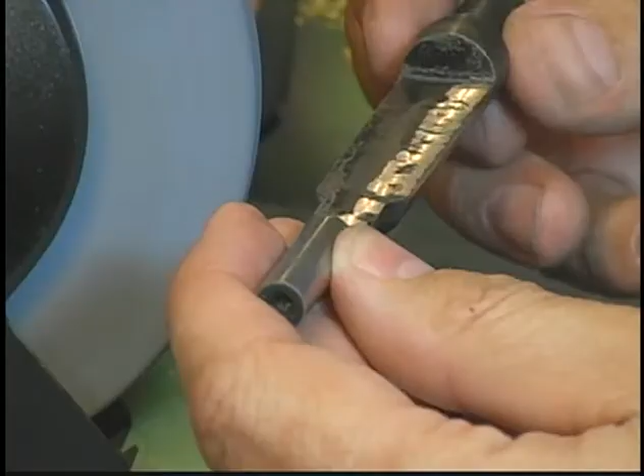And so we're going to do a relief grind on this flat. The purpose of this is so that we'll get a good clean finish when we cut our die or cut our chamber. So let's go ahead and start the grinder up again and see how that's done. The way we do this is we put our face perpendicular to the grinding wheel. When you're looking down on it from above, it's very easy to see.

And what you're going to do is you're going to start with it tipped back slightly from the wheel, and as you get a good grind on it, you'll start to lean it in a little more until the sparks start bouncing off the top edge of this cutting edge. We don't want to go terribly deep because that would change our dimensions.

So please keep in mind that this is just a cleanup, and this is very similar to how you're going to grind a single flute to do this hollow grind yourself. So it's really the same process. We're just showing you that you can either resharpen or it's the process you use when you're making the reamer to begin with.

I'm going to work it back and forth just like I did with the other grinds, and the purpose of that is to try and give me one nice even grind. And I can feel that I'm starting to get a groove that I'm working in, so I'll start tipping towards the cutting edge a little bit to expand that groove. And as I do that, you maybe can see that the sparks are starting to bounce off the top of the reamer rather than just slide underneath it.

And as they start to bounce off the top, I know that I've brought that grind right up to that top edge. As soon as I feel like it's fairly uniform, I'll just stop and take a quick look at it. Well, we're pretty darn good.

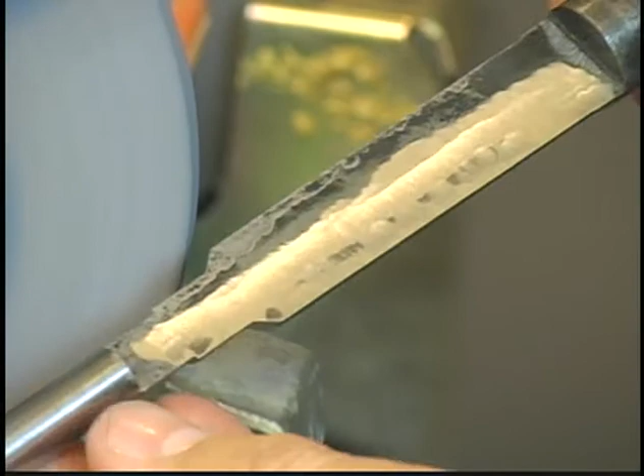The only thing that we didn't grind is a little hand grind deal that I had done on this reamer originally, so that I could get the chips to cut away in a certain fashion. You could do these hand grinds, you don't have to. This hollow grind like we did here is perfect, and it'll remove the chips nice and clean and give us a nice smooth cut.

You know, what I can't emphasize enough is that practice. I mean, this is a fun process. If you're interested enough in this idea of building Wildcats to buy yourself this video, then you're going to enjoy the process of trying to do this and improving your skills and getting better at it.

You don't want to be under pressure the first time you do it for maybe a paying customer or maybe some friends watching you. So build those skills, get good at it, and you're going to enjoy it, because anything technical like this that's part of your hobby that you enjoy, building those skills is always a fun thing to do. Now let me change my setup and we can just go to the sharpening process.

Okay, we're ready with our setup. We have a Versa vise here, and you're going to need some kind of a small bench vise to hang on to the reamer while you're doing this work, simply because it's really hard to do it in your hand. You need to be able to retain some angles and not roll over the edge, so a vise is pretty essential.

Now, you're going to have to forgive me for a small mistake. When we finished milling this, I didn't get it completely deburred, so normally we would do this prior to the heat treat. So just forgive me for my humanity and we'll move on with this. So I'm just going to quickly deburr this edge, and it doesn't take much. We're just using a fine file. We're just going to take off those little burrs that were still there. All the big burrs are gone. We just had a couple little tiny guys standing up from when the mill was there.

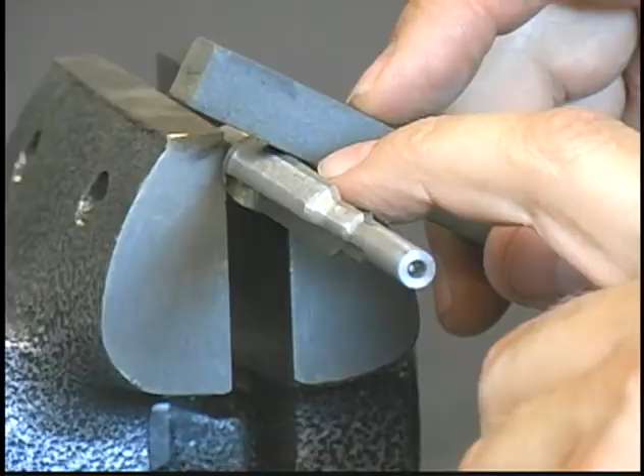Now, when you approach the cutting edge, you want to make sure you don't ever roll on the flat side of the edge, on the cutting face. So in order for me to do this, I'm going to turn the reamer around so that I can get a better grip on it and work on it the way that it fits my hands. So you should still be able to see pretty well what we're doing.

Okay. That'll work for me if it'll work for you.

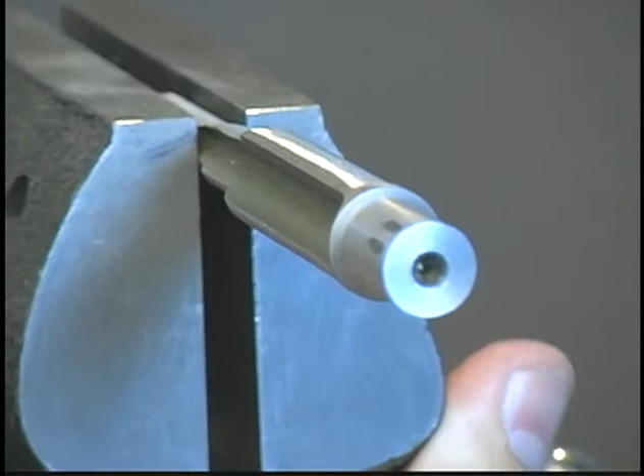So we're going to approach the cutting edge from the backside on our relief grind, and I always try to keep track of where that cutting edge is, because like I said, you do not want to roll past, because that will change the dimension and ruin the reamer. What it'll do if you do it in just one spot, you'll create what's called crown, which is a problem with the backside of the cutting edge actually dragging on the chamber, and that'll usually cause galling and pull material out. Sometimes it'll just leave a really ugly, rough chamber.

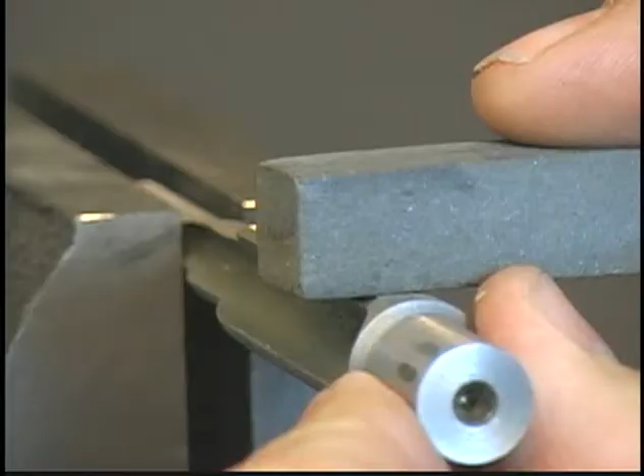But the basic method is start from the back side, and you can just see it change color as you're running the stone along here, and you are relieving some of this backside of this 1/16 inch that we left. And the reason we're doing that is you can't have that much material actually touching the inside of the chamber, but you do have to have enough material to get a full dimension. If we ground up too close to it, we'd have too many chances to grind into that and mess it up. So we leave that 1/16 because it just doesn't take that much hand stoning to fix it.

So I am doing a little bit of a relief on the back side here, and I won't go right up to the cutting edge until I'm pretty comfortable that I've removed what I want from the back side of this little cutting edge we left. So our 1/16 is going to shrink a little at a time, and like I said, you can just watch the color change. It's real easy to see. At this point, we don't need to remove a ton of material for that relief, because all we're doing is getting it to where it's not dragging. We've got our chip relief behind that edge.

Okay, let me take a little look at it here. We're approaching the edge pretty nicely. I'm going to roll it a little so I can see some more. We're going to cut a little bit more. And this is just a patience process. You just have to watch what you're doing. Don't be afraid to cut too much, but at the same time, make sure you don't just roll right on over, because that's the last thing you want to do. A little bit of patience goes a long ways. And if you do screw this up, you just get the honor of doing another reamer right away. So it's pretty critical to pay attention, and if it takes 2 minutes longer, who cares, because I'd rather do that than spend another hour on the lathe.

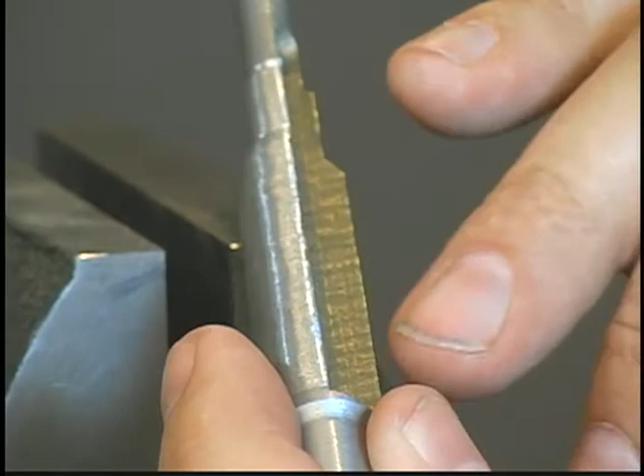Now this is the exact same technique we use on the single flute as we're using here on this two flute. There's no difference in how you prepare this cutting edge. There are one or two little things you can do to a two flute to help make it sharper, and I'll show you those as well. Because you can't do a relief grind on a two flute very well, the simplest thing to get a little extra sharpness out of it is you can take your stone and run it on this flat and just stone back and forth. And if you do it enough, you'll see a shine develop where you're removing the bumps left over from the machining process. And that will help give you a little sharper edge. It's not absolutely essential, but if you find that it's not cutting real clean, that's a way to improve it a little bit. You can stone that flat until you get a nice uniform edge at your cutting edge. That won't be enough to change your dimensions, but it's enough to improve the cutting process.

Now the simple test for whether we've got it sharp or not is just take your thumbnail and scrape it. And if it scrapes off some thumbnail, you can see that keratin there. That's plenty sharp enough to cut metal. And that's all it takes to make a good sharp cutting edge on one of these reamers.

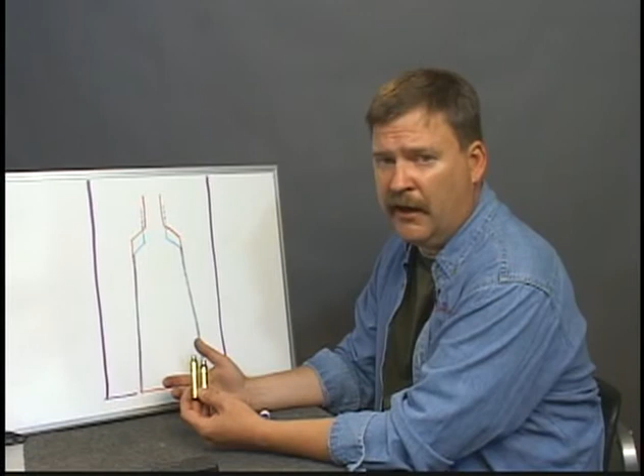Now that you've made a resize reamer and you've made a beautiful reloading die, we need to talk a little bit more about using not only the dies but how you're going to use that resize reamer that you made to make some forming dies. Now you're going to start with something like this. You're going to have a long oversized cartridge and you're going to need to move the shoulder back. And of course there's different shapes and sizes, but this is the example we're going to use. So you want to reduce the shoulder length on your new case.

So let's discuss how we're going to get there. We're going to go to this drawing. This represents, let's say, a die, and the inside blue color is where we're headed. The outside red is our parent cartridge. Now, we do this in steps.

You're going to ream your first resizing die, the standard resizing die you're used to thinking of, and there'll be no other changes to it. So just set it aside, it's done. Now you're going to do multiple forming dies in order to move that shoulder back. We're going to choose a number. In this case, we're going to say that this shoulder has to be reduced 100 thousandths in total.

So we just take 100, and I think I told you earlier in the process that the most you can move brass on its diameter in is about 40 thousandths in a pass when you're resizing. If you go more than that, you're going to start to see problems. So I'll show you a few of those problems here in a minute. But if you've got 100 thousandths you've got to work with and you can only go 40 at a pass, you're going to divide that up.

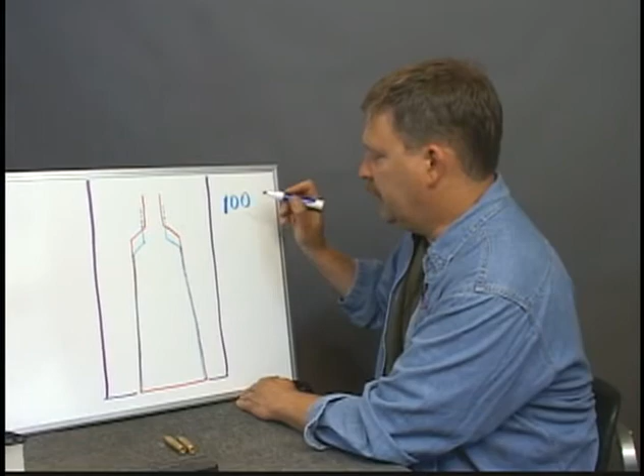I almost always make the first step 40 thousandths. And the reason I do that is because at that point the brass is at its strongest and it's going to be able to take that deformation without any real problems. Now, we know that we've got 100 to work with, so we'll do 2 of them at 40 and 1 pass at 20. Now, because this final pass is at 20, you might be able to get away with using your resize die as the final die, and you'll have to experiment to find that out.

So, let's just go ahead and look at what will happen. Our first die, the first 40 thousandths, we're going to come over here, and I'm going to leave this side alone so that you can remember what we started with. This side we'll make the changes on. So you're going to take your resize die that you've cut, and it's cut to this dimension, the blue dimension, because you used your resize reamer we made to make that die.

Now you need to do this in steps. So if you were trying to cram this piece of red parent brass into this new shape, there's no way it would go. There's just too much brass here to move in one pass.

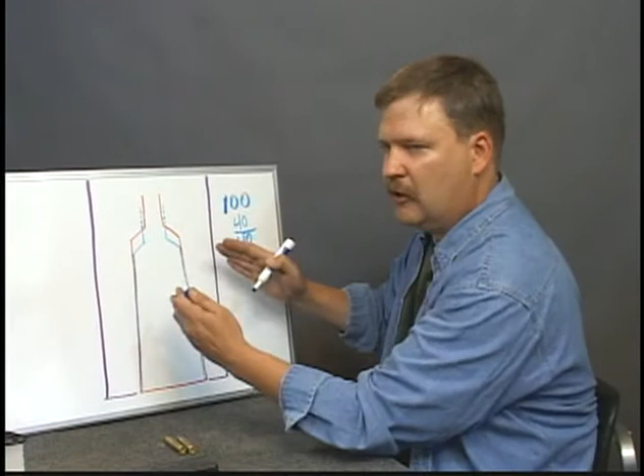So what we do is we take a drill bit and a chucking reamer or a decimal reamer. You can buy chucking reamers in individual decimal increments, and that's why they're called decimal reamers. So you can pick the exact reamers you need, or you can buy ones that are close. You might have a set that gets you close. As long as you're pretty close to this 40 thousandths, it'll work just fine. So you drill this hole out, and I always do the largest one, like I said, 40 thousandths. So I'm just going to basically do this.

So now we have the body dimension we took off of our resize reamer, and we're boring out the neck dimension all the way through the die so that we have a clean pass for the brass to pass through. And what we're going to be doing is moving this shoulder right here, the red. Let me move that out of your way. We're going to remove this and resize it down to that blue shape. So we have simply made this die bigger in the neck, but allowed us to shrink that shoulder and get this shoulder angle.

Now, then we're going to do another 40 thousandths. So you just simply repeat the process. You're going to go to a smaller drill bit and a smaller decimal reamer to get this next 40 thousandths. So we're going to come in and we're going to be pretty close to our final dimension. Okay, and then that's going to remove this part of the shoulder.

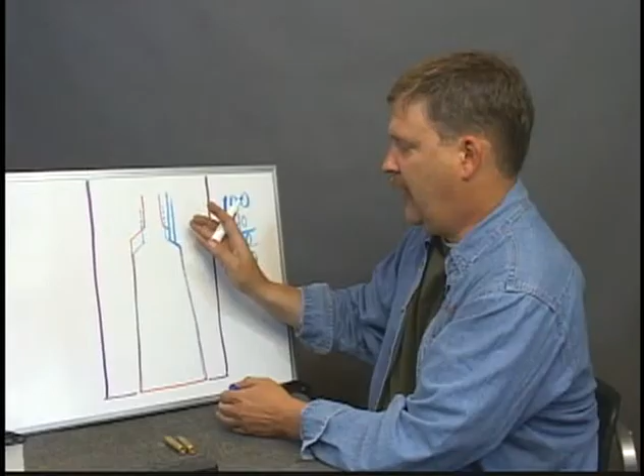And actually at each stage of this, I stop after I make each die and I do a test run with 5 or 6 pieces of brass. If they seem to be forming okay and everything's working well, then I just continue with the process. So you do that after each one, and when you do the first half dozen pieces of brass, you can use those for the next step, and then of course the final step.

And the reason I do a half a dozen or so is because inevitably a few of them get damaged in the process, and you want to have enough to be able to test without having to start from scratch, since you're going to have to put those dies in the loading press to test them. So you get to this final step, put in the final normal resizing die, run a test piece. If it forms properly and everything's okay, you're done.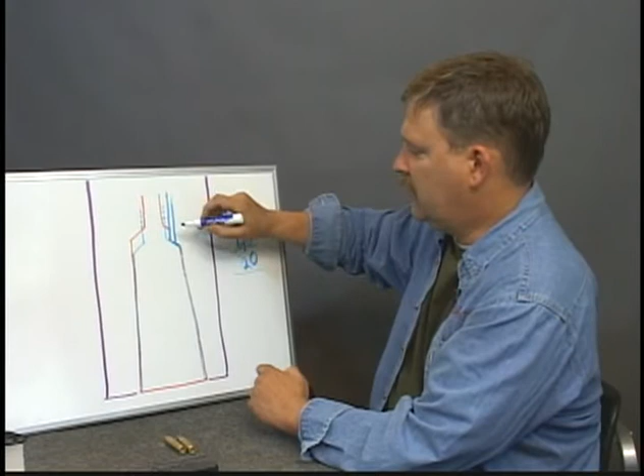If you see that you're getting unusual deformation, that the necks are collapsing, if the shoulder's trying to buckle out, and you're not comfortable with the way it looks, then all you have to do is make this final 20 thousandths die. And when you do this, I would make sure that you leave yourself just a little bit of dimension compared to your final resize. So you're going to want to make sure that the hole is slightly bigger than your neck diameter in your final resize. So 1 or 2 thousandths is enough. I mean, you just need enough so that your resize die can do the finishing job.

And then you'll just make this last 20 thousandths, you're going to come in, you're going to make this into a solid line all the way up. And now when you resize, it'll remove that last piece of shoulder, and ultimately you're going to end up with this shape. Now remember, it's going to be the same on both sides. We did this so you could see, here's where we started, here's where we ended up.

Okay? Now I have a couple of sample pieces of brass that I want to show you that show various forms of deformation. This first one was made by a student in one of my classes, and you can see, when we look at the shoulder area right here, that it's clearly buckling a little bit, and he's actually got a little bit of deformation on the outside of the shoulder. So you can tell that we're moving a little too much brass a little too fast. Now he understood this and knew that this would fire form out, and he wasn't concerned about it. He also knew that when he made his final set of dies, he could correct this problem. Let's look at a couple of others.

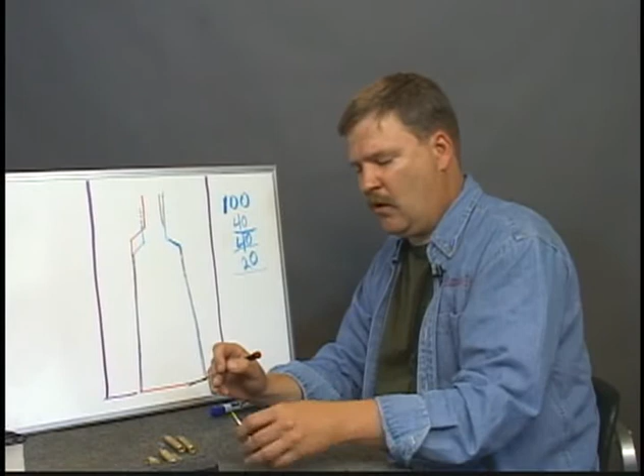This one is actually the same cartridge as the last one you saw. This is finish formed and of course with a bullet seated. You can see a line here where there was a buckle where the shoulder had been pushed out a little bit in the forming process, and when this was fire formed, it was removed in the fire forming process, but the line's still visible. You can also see a little bit of stress along the shoulder.

These lines that run along the length of the shoulder are stress from the reloading process. They really don't hurt anything. They're kind of ugly, and if you can avoid this, you make a better looking cartridge and you look more professional. So when you see these things, keep in mind that you're pushing the brass a little too hard. Okay? We do need to talk about another factor on our drawing here.

We ended up with a neck on our parent case that is a little smaller than our finished blue Wildcat case. The solution to that is the expander ball on your resize die is going to take care of expanding that neck. Now in an extreme case, I have some examples of how we can Wildcat a case by expanding the neck up and retaining the same shoulder angle. So it's sort of the reverse of what we did here.

Here we reduced our shoulder, moved our shoulder back one step at a time until we got to the desired shape. The other way that we're going to look at right now is to increase the neck diameter retaining the same shoulder angle. So we're actually just pushing this neck diameter out this way and keeping the shoulder angle. So let's take a look at a couple of those.

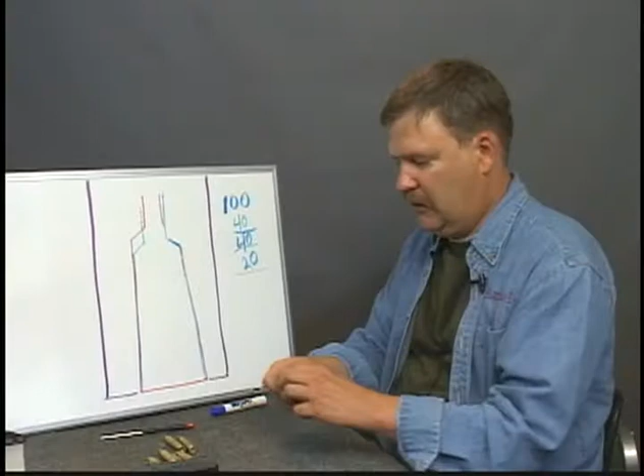This is the cartridge we started with at the beginning of the course, the 25 WSSM, and we're going to turn it into the 358 Indy. So this is the very first step. This is the factory piece of brass. It's a 25 WSSM. The next one in line is where we have expanded it, and I tried to go up as far as I could in each step.

This is about an 8mm neck, so you should be able to see an 8mm bullet in that case. And I found that I could do that without collapsing the shoulder or without tearing the brass. And those are the two things that are likely to happen when you're expanding the neck.

A tapered expander ball is required for this process. If you've never seen one, the manufacturers make various styles of them, or you can make your own, and it's simply a very shallow angle on the front of an expander ball. About 10 to 15 degrees is perfect for expanding brass. Of course, you'll have to lube the inside of the necks to make it work.

Now, the next step for this cartridge was to go to 375. And at 375, the reason we did that is because this brass has the problem we've talked about before about getting thick in the body area. And it's even thick up on the shoulder. So the idea that I had was I'll go ahead and expand it up to 375, and then what I chose to do was turn the outside of the brass in order to remove that thickness.

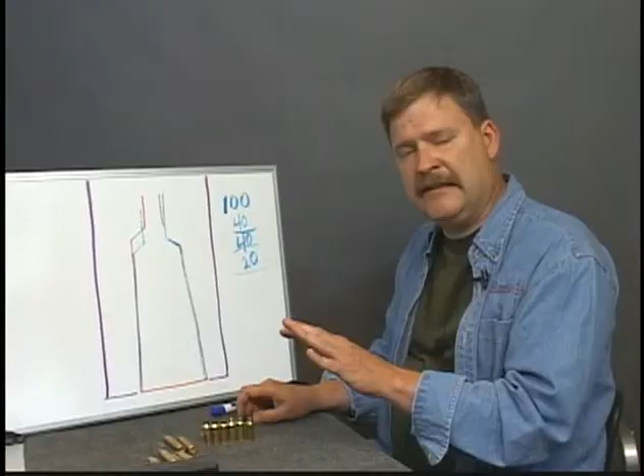So now that we've talked about forming, it's probably a good idea for you to just think back on the few things we talked about, which was watching for deformation of brass that's not normal. When you see those things, it's pretty simple. You just have to slow down, figure out what the problem is. Sometimes it could be the brass. Sometimes it'll be that you didn't make enough step dies to do your sizing process. And every type of brass is different. It's either going to be heat treated differently, or it's going to be thicker or thinner.

So that's the thing about wildcatting, is you have to kind of fly with it. You have to find out what works with the particular design you're working with. I'm sorry I can't hold your hand through the whole process. I'd like to, but I think you'll have a lot of fun learning. I know I had a lot of fun. Each step of the way I learned something, and like most people, I feel like if I learn something every day, I'm still alive.

Now that we've pretty well covered forming brass, I thought I'd just go back and touch on a few things. It's really important that you pay attention to the deformation problems we've talked about. If you see brass that's overly stressed, then you know that you are pushing it too hard. A simple fix for this is if, let's say you started with that first die at 40 thousandths reduction, and you see that you're pushing the brass too hard and it just doesn't look right.

It's pretty simple. You just go back to your lathe and you're going to ream out that hole maybe another 10 thousandths, and go back and try to resize that piece of brass again, or a new piece of brass, to get that form. If you don't see the stress problems anymore, you've solved the problem and you can move on. You also, in the process, are saving that one die and using it so that you don't have loss.

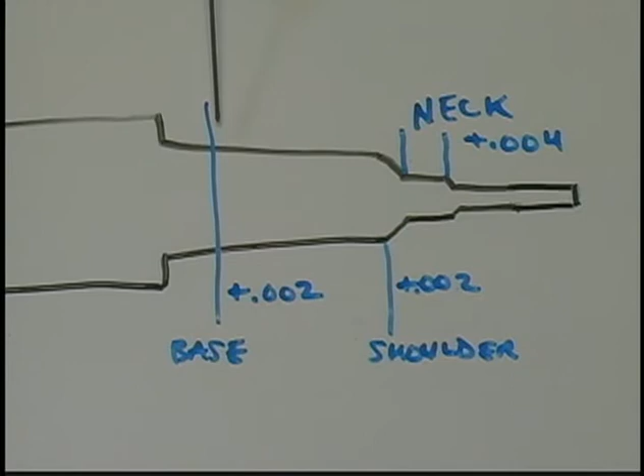Your base dimension of your cartridge from the drawing that you did originally on the chamber is going to be +2 thousandths at the base. On the shoulder it's going to be +2 thousandths, and on your neck this entire area will be +4 thousandths, and that's to allow expansion for the bullet to escape.

When you come to the throat area, you need to keep in mind you have a couple of choices. You can either put the throat on this reamer yourself, and the simplest way to get those dimensions would be to find a drawing from one of the reamer makers for the same cartridge or for the same bore diameter, and that'll give you the SAAMI specifications for diameter, length, and lead.

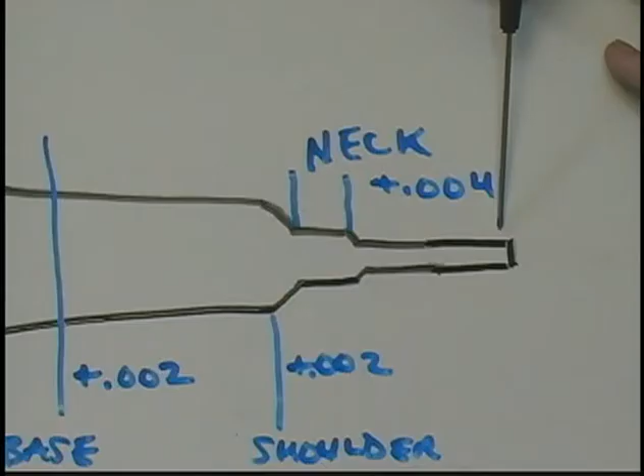When it comes to the pilot of the reamer, remember it has to be able to sit on the lands of the barrel. So you can take some pin gauges or some other form of measure and check the bore diameter so you know what dimension to make this pilot. Generally, there are some standard dimensions you can pull from your research that will give you this information. If you don't want to put a throat on your reamer, then just go ahead and use a throating reamer. They're readily available from the manufacturers, or you can rent them from one of the rental houses.

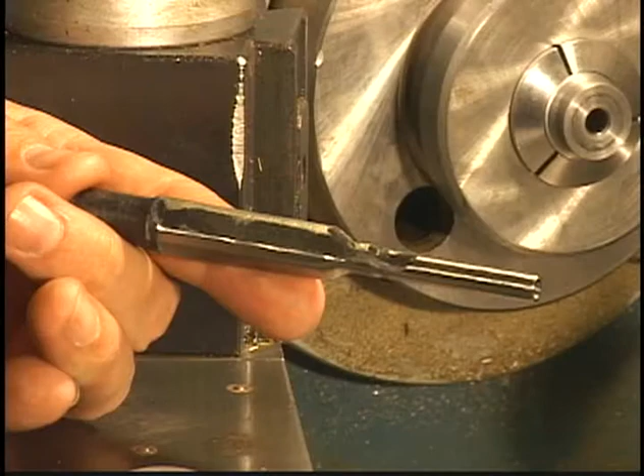Okay, we've moved to the lathe and we're going to do some cutting on a die so that you can see that our reamers actually do remove metal and make chips. We have a 2-flute reamer here to the same design that we talked about before. Let's take a look. So here's the drive shank. You're going to need that on all reamers in order to be able to use them. You've got our continuous taper for the body, shoulder angle. This one has a neck on it, and it has a relief cut because it's a 2-flute that only goes part way through the reamer, and a nice long pilot.

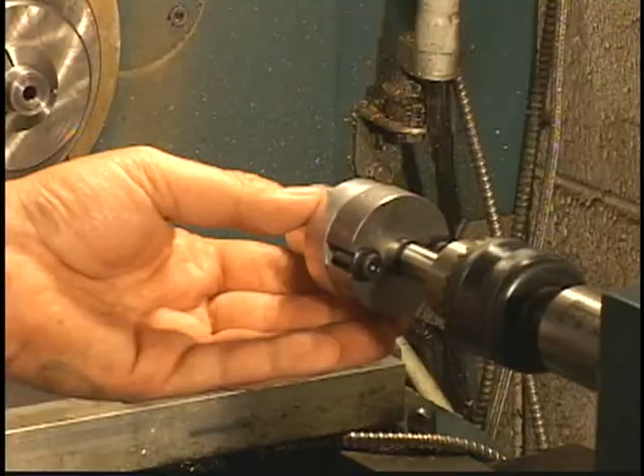It's important to use a floating reamer holder because it keeps your reamer in alignment with the die body. Now if you didn't use one of these and your tailstock happened to be out of alignment, it would cause you to cut an oversized bore in your die or your chamber, and this would be, of course, a problem. So let's go ahead and install the reamer in the tailstock, and it's a pretty simple matter of using a set screw. Okay, we're all solid. Now you can see that the floating reamer holder is able to move in all directions.

Okay, now that we've got everything set and ready to go, we'll put a little cutting oil on our cutter. Be liberal with it because that's what's protecting it. And we'll run it up into position here, get us close. We're ready to go. Lock down the tailstock, and let's turn this thing on and get it going. Okay, so we're just going to align the pilot so that it goes into the bore. We'll run that right up in there.

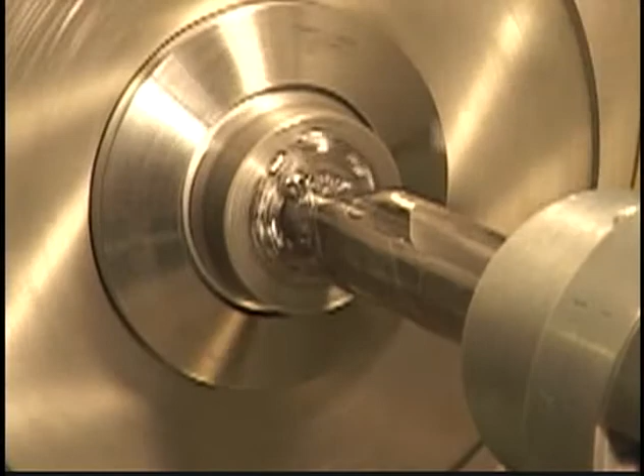And we're going to start to cut. Here we go. See little chips already starting to come out. I usually go about 50 thousandths on that first little cut and stop, back it out, take a look at what we're getting. You can see that we're getting a nice clean hole, and the chips are starting to form nicely. So we clear things off, put some fresh oil on, and then of course we'll run our tailstock back in there so we can cut some more.

Okay, so we align our pilot with the hole, get it up close, lock the tailstock, and start cutting. And it cuts very smoothly. You could feel very little resistance. Usually at this point I still only go about 50 thousandths and stop and clear again. Okay, we're going to pull it away, clear it off. Some more cutting fluid. We're ready to go.

Okay, we're going to go ahead and make another cut. I'm just going to start getting into the shoulder very quickly here. And once it does that, we can usually just go ahead and go right up the shoulder and watch those chips form. Okay, there they come. Looks very nice. Okay, let's stop right there. So we'll clear this out, clean it off once again. Fresh cutting oil. And we'll go back at it.

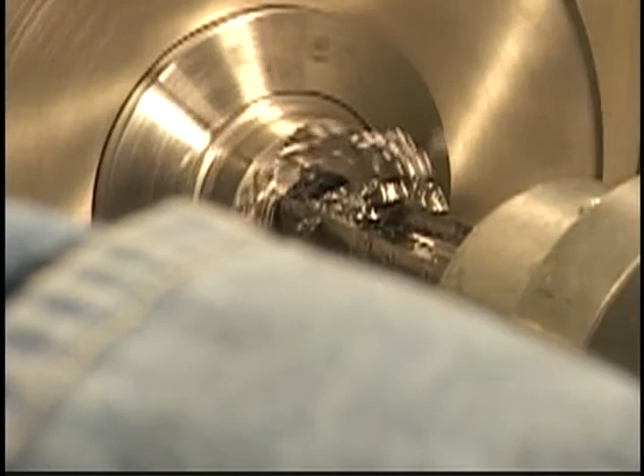All right. So we're going to go back in. You can see we're pushing out some nice chips now. Amazing how much a homemade reamer can do. Every guy I've ever taught this method to has been absolutely amazed that you could peel off this much metal with something he made with his own hands. Okay, let's pull it out and take a look at our die.

Okay, you can see that we've got a nice clean shoulder started. You can see that we have a nice neck down inside there. The reamer's cutting a very nice finish, and you couldn't ask for much more from any tool, let alone one that you made yourself. Okay, the reason we stopped here was because at this point you could see the finish we're cutting, and there would be no point in finishing anymore.

Another thing that always comes up at this point in the process, people ask what the headspace is going to be on the reloading die. It's very simple. It's always 130 thousandths. And the reason for that is your shell holder is 125 thousandths high. The extra 5 thousandths is to allow you to set headspace to match your gun. And almost all manufacturers of reloading dies do that. So just add the 5 thousandths, call it a total of 130. You'll be able to move your shoulder up and down a little bit if you need to in order to match the gun. And that's all there is to it.

Now that we've finished the entire course, I thought we'd take a couple minutes to talk about some of the important points that we've covered. The first thing you want to think about is the design process. When you start out, you're going to have an idea or a concept. Now the whole world is open to you. You're really the king here. You can pick any idea for any reason. If you want to put a specific cartridge in a specific gun, then you get to design one that'll work. If you want to have a cartridge that suits some other purpose and you'll figure out the gun later, that's fine too. Remember that it's up to you what you pick. Everything is open. There are no limits.